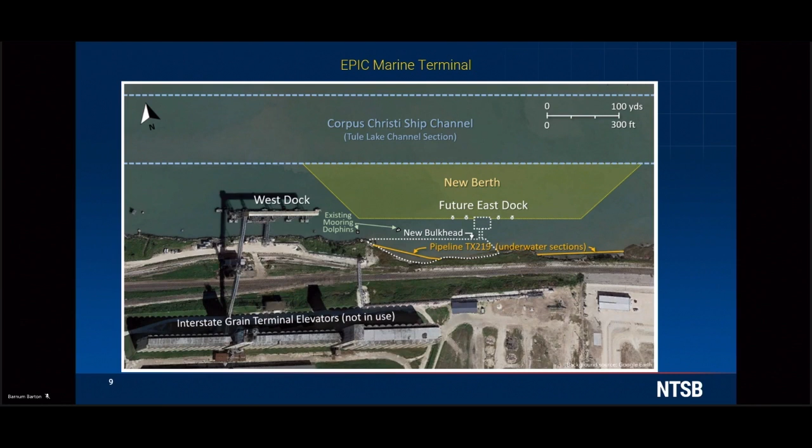Later that year, Epic began planning for a second crude oil dock to the east. The new berth and dock, labeled Future East Dock and highlighted in the yellow shaded area of the image above, required construction of a bulkhead along the shoreline and dredging of a new ship berth between the dock and main shipping channel.

Orion Marine Group, a subsidiary of Orion Group Holdings, a heavy civil marine construction company, was selected by Epic to construct East Dock and dredge the associated berth. The marine construction and dredging operations were contracted separately and undertaken by different divisions within Orion.

Schneider Engineering and Consulting, a wholly owned subsidiary of Orion Marine Group, developed the dredging construction plan for Epic's East Dock, which will be discussed later in greater detail by Mr. Ehlers. The non-propelled 152-foot-long cutter suction dredge Waymon Boyd was used for the EPIC dredging project.

Waymon Boyd operated 24 hours a day in two 12-hour shifts. During normal 12-hour shifts, the dredge and its attendant barges and supporting vessels were crewed by 17 to 19 personnel.

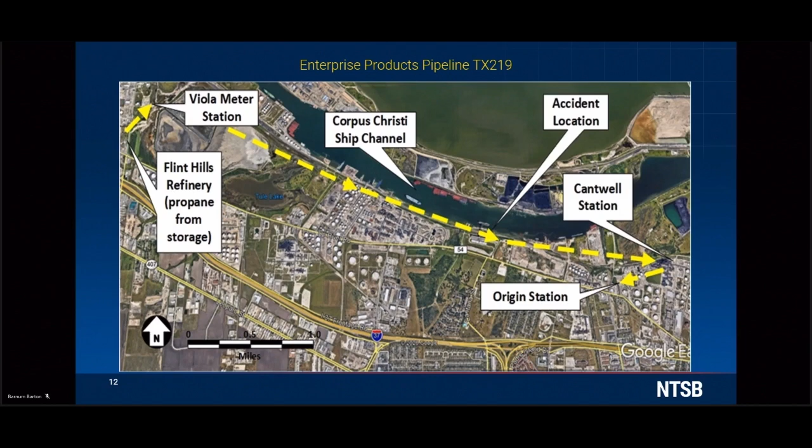Near the accident location, the pipe was coated with coal tar and a 2-inch thick exterior concrete coating. The pipeline was constructed in 1968. The breached pipe had a 16-inch outside diameter. The pipeline pressure was 257 pounds per square inch gauge at the time of the accident.

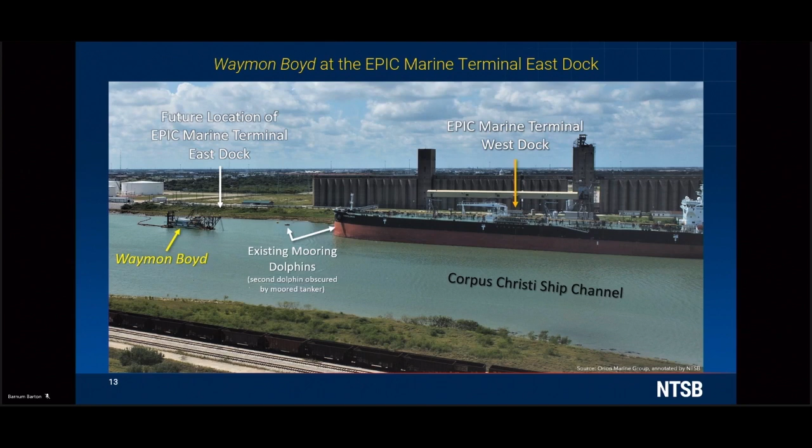On August 21st, about 8:02 a.m. Central Daylight Time, TX219 was struck by the Waymon Boyd's rotating cutter head, causing a breach in the line that allowed propane gas to escape and form a gas cloud that surrounded the dredge.

EPIC's marine terminal security camera footage that I will now play for you captured the initial breach of the pipeline and the eruption of water and gas, the initial explosion and ensuing fireball that made its way up to the grain terminal. For reference, the security camera is looking west at EPIC's West Dock. Waymon Boyd is just outside of view of the camera on the right-hand side, center line of the frame. A portion of the video prior to the explosion has been sped up to reduce the length of the video.

I will pause before starting to allow those that do not wish to view to look away. The video is 76 seconds in length. Viewers' discretion is advised. Please start the video.

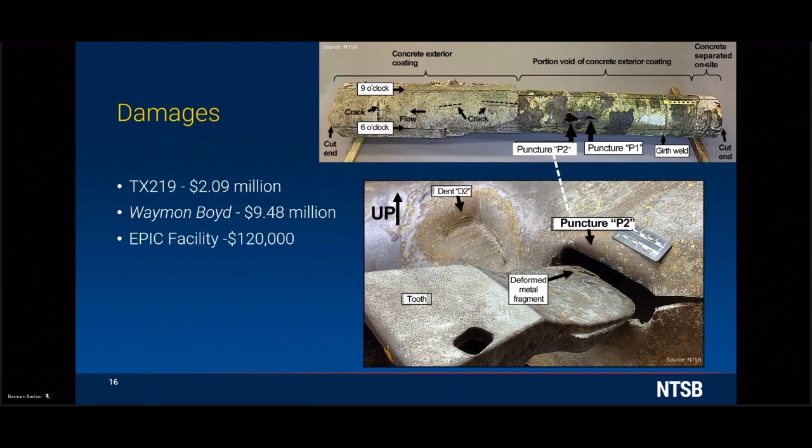This concludes my presentation. Mr. Ehlers will now discuss nautical operations.

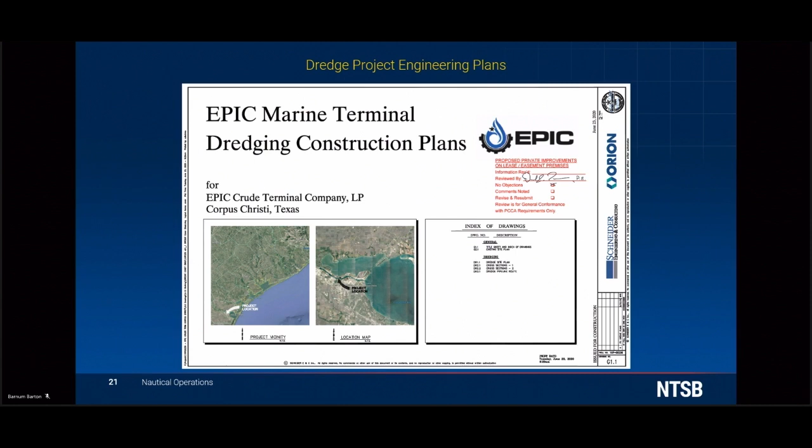The first drawing in the Schneider engineering plans, titled Existing Site Plan, showed a satellite image of the project area. The plan included an outline of the 46.5-foot deep berth that was to be dredged, as well as 3 pipelines that ran along the shoreline.

The location data for the pipelines had been provided to Schneider via Orion by the site owner EPIC and were based on a 2018 utilities survey. The most northerly of the pipelines was TX219, the accident pipeline.

The plan did not show no-go areas, also known as tolerance zones, around the pipelines. This area southward of the berth that was to be dredged on a slope was also not depicted in the drawing.

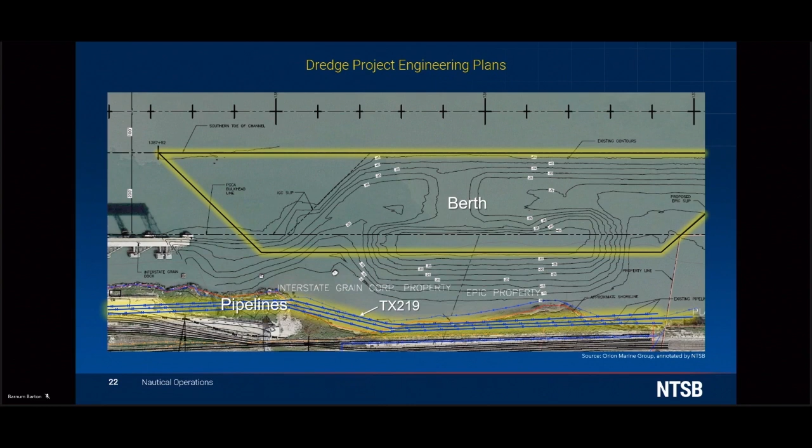The next drawing in the Schneider plans, titled Dredge Site Plan, showed a line diagram of the project area. The plan included the outline of the berth that was to be dredged and also showed a partial depiction of the sloped area to be dredged.

However, the slope was not shown in the area of a proposed bulkhead. This bulkhead had not been constructed at the time of the accident. The pipelines that had been shown in the existing site plan were not shown in this drawing or any of the remaining drawings in the full set of plans.

Thus, there was no drawing which showed both the pipelines and the full extent of the dredging area, including the slope. In the plan legend, which was in the lower right corner of the dredge site plan, the shaded area in the drawing was labeled dredge limits. However, in the drawing, only the berth was shaded and not the slope that was to be dredged.

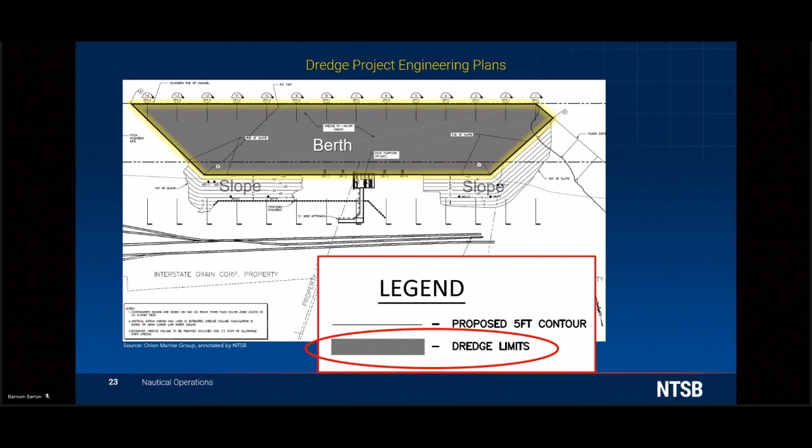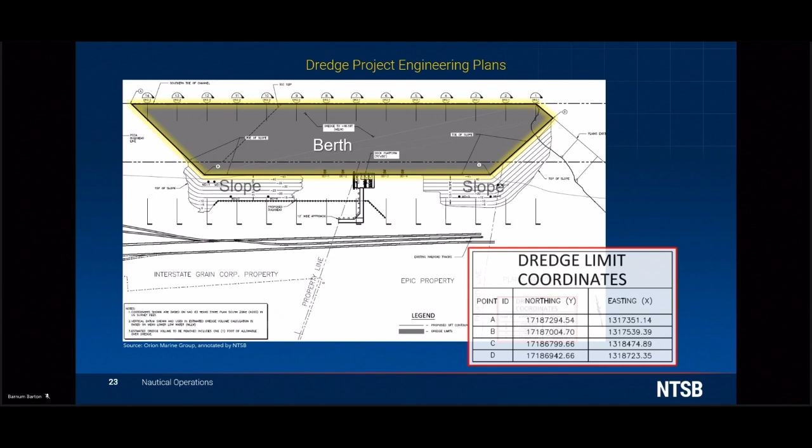A table with geographic coordinates was also located in the lower right corner of the dredge site plan. Although the table was labeled dredge limit coordinates, the points in the table once again marked the berth area only and not the full extent of the dredging area, which included both the berth and the slope.

Staff found that the plans for the Epic Dock project did not clearly reflect the proximity of the pipeline to the full dredging area. This was because Schneider Engineering and Consulting did not have company specifications, quality control measures, or best practices for including pipeline hazards and tolerance zones in their plans.

As a result of this finding, staff proposes that Orion Group Holdings require their subsidiary company, Schneider Engineering and Consulting, to develop specifications and quality control measures to ensure pipeline and other hazard data is included and clearly represented in engineering plans and drawings, including depicting tolerance distances from underwater hazards. Mr. Stansel will further discuss the Epic Dock plans and factors relating to the accident during his presentation.

The operator of a dredge, known as a leverman, cannot see the cutter head he or she is controlling or the surface being excavated. Therefore, the leverman uses a computer application to provide a virtual display of the digging tool and dredging area. The application used aboard the Waymon Boyd was called DredgePack.

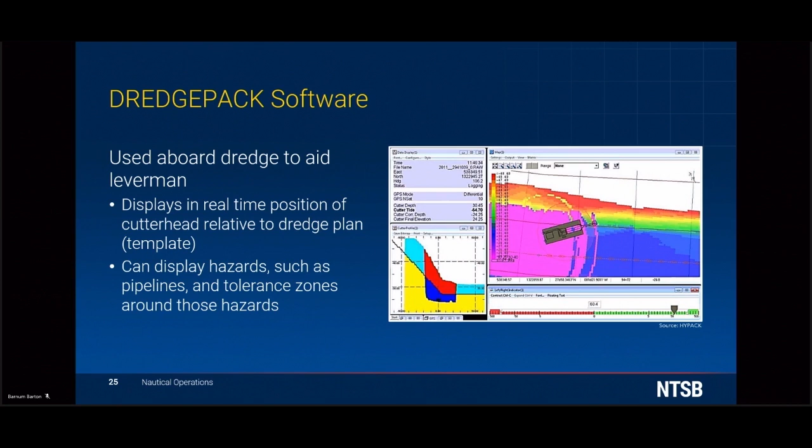Having accurate pipeline location data incorporated into DredgePack or other navigation software on board a dredge is critical to avoiding pipeline strikes and other potential hazards. However, Orion had no written procedures requiring pipelines or other utilities be entered into DredgePack. Although Epic provided location data for pipeline TX219 to Orion before dredging began, Orion did not include the data in the DredgePack dredge template used aboard the Waymon Boyd.

Consequently, the Waymon Boyd leverman had nothing in DredgePack to indicate the danger he faced on the morning of the accident. Above and beyond the use of DredgePack, the investigation uncovered that Orion Marine Group did not have any written procedures or policies for planning dredging operations near pipelines. These policies and procedures could have enabled the company and its personnel to establish effective pipeline damage prevention measures and share them among key employees involved in the Epic Dock project.

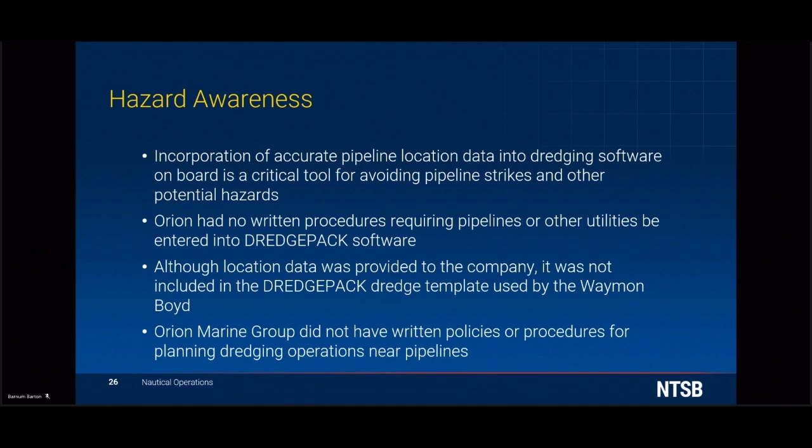Staff found that Orion Marine Group did not have adequate procedures to require that pipelines be identified and included in DredgePack software. Thus, the Waymon Boyd's leverman was unaware how close the cutter head was operating to the pipeline. Further, staff found that overall, written policies and procedures could have eliminated confusion about the pipeline TX219 location and minimum tolerance distances for pipeline damage prevention.

Thus, staff proposes that Orion Group Holdings require Orion Marine Group to develop standardized written procedures and policies for planning dredging operations near pipelines that include pipeline operator engagement on pipeline avoidance measures, minimum tolerance zones, minimum requirements for marking and verifying pipelines, and uploading of pipeline information into DredgePack or other navigation software.

The leverman told investigators that just before the accident, the dredge cutter head was near the top of the slope in the dredging area and fully within the boundary of the template. However, staff determined that at the location of the breach, pipeline TX219 was about 1 foot outside the dredge template. The Waymon Boyd cutter head was over 100 feet from the operator, turning below the water surface, and the leverman was reliant on DredgePack software to position the 2.9-ton digging apparatus.

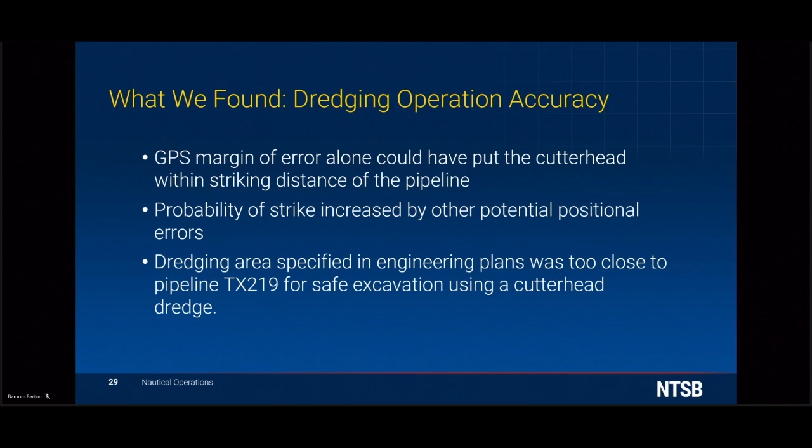The Council for Dredging and Marine Construction Safety, abbreviated CDMCS, is an organization whose stated purpose is to create an injury-free workplace and safety-first culture for the dredging and marine construction industry. In January 2020, eight months before the accident, CDMCS published a best practices guide for safe dredging and construction activities near underwater gas and hazardous liquid pipelines.

Contained within the guidance were recommended actions for dredge crews in the event of a pipeline strike. These actions included immediately stopping all operations, shutting down or minimizing the use of possible ignition sources, accounting for the crew, informing them of the dangers, and evacuating the vessel if needed. Although Orion Marine Group was a member of CDMCS, the company did not train its crews in these recommended actions and did not have an emergency procedure for a pipeline strike. Consequently, when the Waymon Boyd struck the TX219, the leverman did not secure sources of ignition, inform the crew, or order an evacuation—actions which may have delayed the explosion.

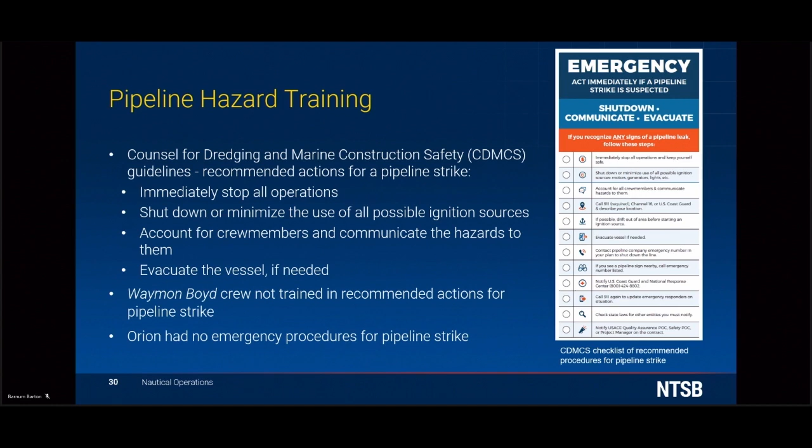Staff found that prior to the accident, the Waymon Boyd crew lacked function-specific pipeline safety training and emergency procedures that could have prepared them to react quicker and more effectively to the gas pipeline strike.

After the accident, Orion addressed this issue by instituting semi-annual utilities awareness training, which includes emergency procedures in the event of an accident. Additionally, emergency procedures in the event of a pipeline strike have been integrated into periodic fire and abandon ship drills conducted on Orion dredges.

Staff believes that the entire dredging industry would benefit from training on utilities awareness and emergency procedures in the event of a pipeline strike. This need can be addressed through an interactive online pipeline safety training course developed by the Coastal and Marine Operators Pipeline Industry Initiative, or CAMO, titled Working Safely Near Underwater Pipelines. The course covers topics such as planning steps for pipeline and marine construction personnel, project design implementation, pipeline avoidance, and daily safety and emergency checklists.

This CAMO training would be further enhanced by the use of examples and lessons learned from the Waymon Boyd pipeline strike and explosion. Therefore, staff proposes that CAMO modify the existing online pipeline safety training to incorporate lessons learned from this accident.

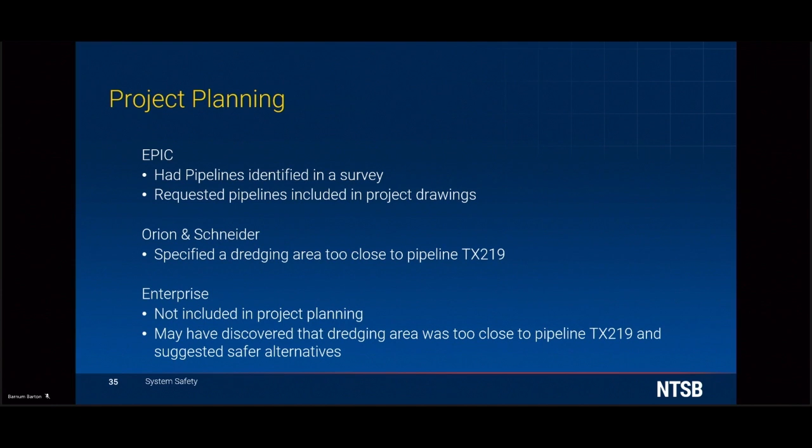Orion's Health, Safety, and Environmental, or HSE, policies manual required the completion of a site-specific safety plan for the project. The regional HSE manager who developed it said it was an emergency response plan, which he completed by inputting applicable maps and phone numbers. He did not complete a risk assessment and was unaware of the pipelines near the dredge area. The site-specific safety plan did not address the pipelines in the area of the project, nor any site-specific risk. It did not help the captains, crew, or levermen manage the risk associated with dredging near pipeline TX219.

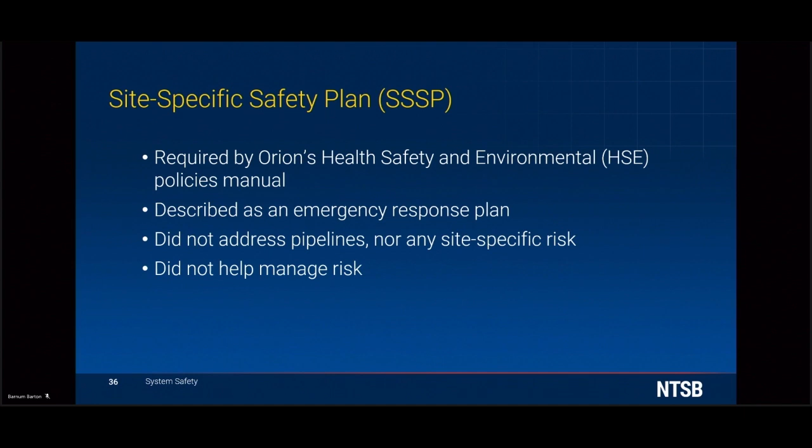Orion's HSE manual required a job hazard analysis during the pre-planning stage of the project. However, there is no evidence that this was completed. Orion did not complete a formal risk assessment for the project. The hazard presented by conducting dredging operations near pipeline TX219 was never formally identified or documented, and the risk was not completely understood.

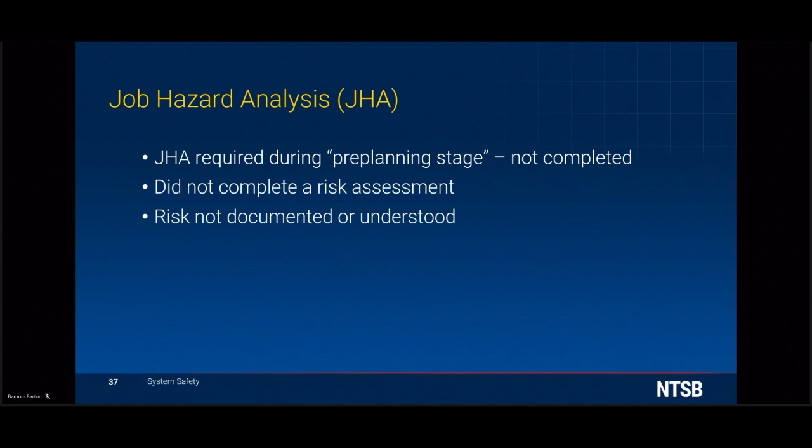Effective controls protect workers from workplace hazards and help avoid injuries, illnesses, and incidents. Orion's HSE manual indicates that the hierarchy of controls should be used to mitigate hazards. It requires that when a hazard is identified, first attempt to eliminate the hazard. If elimination is not practicable, use engineering controls. If engineering controls are not practicable, implement administrative controls, and so on.

Engineering controls were available to control the risk of a cutterhead impact with pipeline TX219. Orion could have established a tolerance zone around the pipelines in the engineering plans.

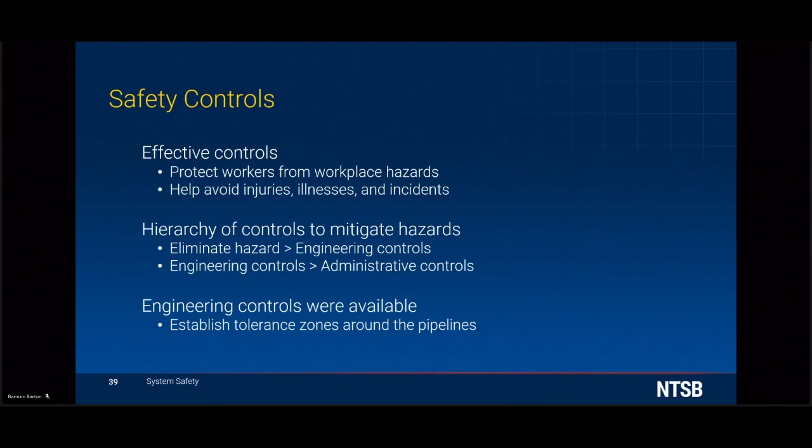Staff found that Orion's project planning and risk management were inadequate, which resulted in their failure to identify and mitigate the risk of a cutterhead impact with pipeline TX219. Staff believes it is critical that organizations have project planning steps that support accurate risk assessment and proportionate mitigation. Thus, staff proposes that for all future dredging projects, Orion conduct a formal documented risk assessment and develop a hazard control plan.

This concludes my presentation. Mr. Stansel will now discuss pipeline operations.

Good morning, Chair Homendy, Vice Chairman Landsberg, and members Chapman and Graham. My presentation will cover pipeline damage prevention safety issues that were identified in this investigation.

One-call systems allow excavators to make a single notification of their intent to excavate. One-call centers contact affected utility operators, who in turn are responsible for communicating with the excavator to review project plans and assess potential impacts to their facilities.

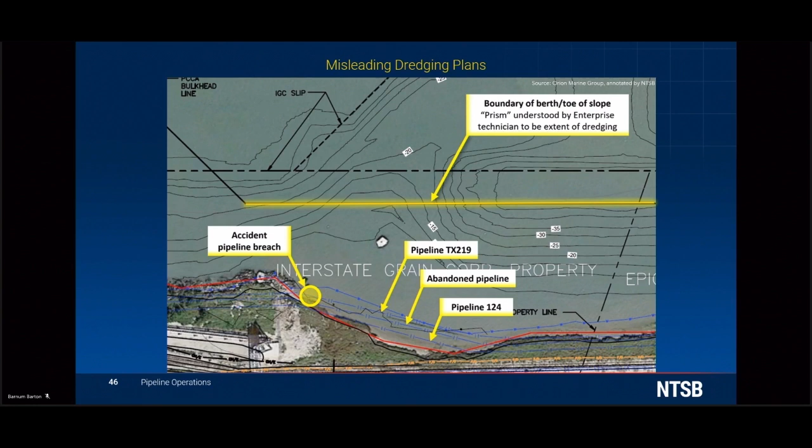As a result of their assessment of plans and information provided by the project engineer, Enterprise technicians closed the one-call tickets, believing pipeline TX-219 would be clear of the project and there would be no dredging near the shoreline. Thus, technicians concluded that no marking or other protective measures would be required because the dredging boundary exceeded the Enterprise Damage Prevention Program 50-foot distance limit for mandatory marking.

Investigators developed this image to depict information that was available to Orion during the planning phase of the dredging project. Investigators incorporated pre-accident pipeline survey data into DredgePack software and built a dredge template with 2.5 to 1 slopes identical to that which would have been loaded onto the Waymon Boyd's computer. The combination of this data shows the outside diameter of the pipeline was actually situated only about 1.2 feet from the edge of the dredge template at the accident location.

Had this information been available to the pipeline technicians during their one-call review, they likely would have recognized the need for compulsory marking and the presence of a pipeline technician on site to monitor dredging work, among other actions to protect the pipeline.

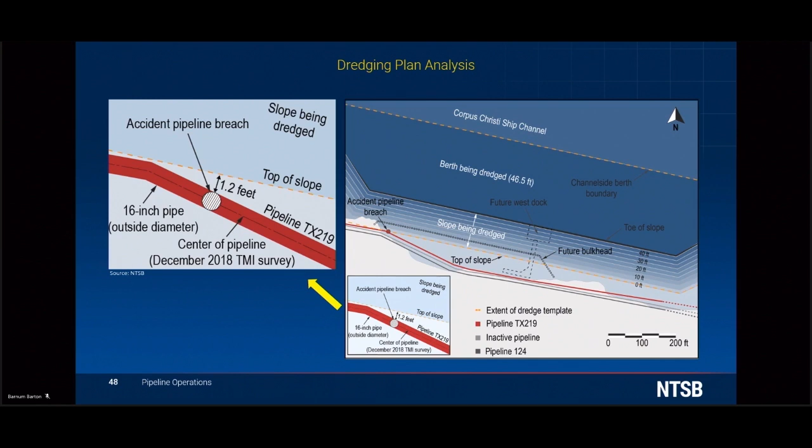In summary, staff found that inaccurate communications following the one-call notification and misinterpreted dredge plans dissuaded Enterprise from installing compulsory pipeline markings and implementing other protective measures. Staff also found that marine construction projects require a greater level of collaboration and engineering review to ensure pipeline operators have greater awareness of the project scope and that potential safety impacts are accurately assessed.

Therefore, staff proposes that Orion Marine Group develop written dredge planning policies to include utility operator engagement for pipeline avoidance measures. Further, staff proposes that the Pipeline and Hazardous Materials Safety Administration, the coastal and marine operators, and the Council for Dredging and Marine Construction Safety work together to develop processes for disseminating accurate pipeline location coordinates to dredge operators during planning and one-call locating activities.

Next, I will discuss how the pipeline was marked prior to the accident and shortcomings in excavation pre-marking requirements.

Given the Enterprise one-call review that determined dredging would occur outside of their 50-foot mandatory marking zone, pipeline technicians did not mark the pipeline for excavation damage avoidance.

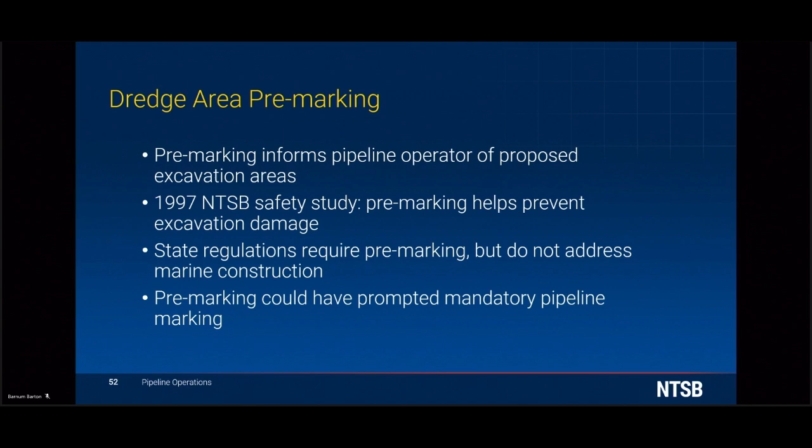In summary, staff found that the widely spaced courtesy marking did not provide sufficient visual warning to the dredge crew of the danger posed by the presence of the pipeline.

Additionally, to ensure more accurate communications, staff believes that project boundary pre-marking would provide utility operators with visual confirmation of pipeline encroachment.

Therefore, staff proposes safety recommendations to the Pipeline and Hazardous Materials Safety Administration, the Coastal and Marine Operators, and the Council for Dredging and Marine Construction Safety to work together to develop guidance for pre-marking dredging project boundaries before one-call notifications are made.

Finally, I will discuss the need for more expansive tolerance zones for the safety of dredging projects near pipelines.

Tolerance zones define areas near pipelines where no mechanical excavation activity should occur, and within which extra protections are needed for safe dredging.

Texas and many other state regulations require excavation equipment to maintain a minimum buffer of at least 18 inches from a pipeline wall. In addition, Enterprise procedures require technicians to be on scene to monitor activities when excavations occur within 12 feet of a pipeline.

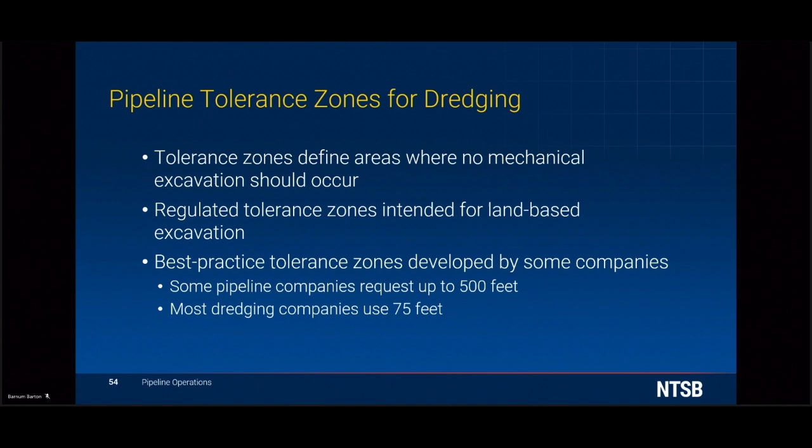In summary, staff found that inherent cutterhead dredging location inaccuracies make state-regulated tolerance zones inadequate for safe dredging. Additionally, staff found that Enterprise's Damage Prevention Program does not provide for a sufficiently large tolerance zone for dredging operations. Therefore, staff proposes a safety recommendation to the Pipeline and Hazardous Materials Safety Administration to ensure that states incorporate minimum

tolerance zone criteria for dredging in their pipeline safety programs. Staff also proposes a recommendation to Enterprise Products to revise its damage prevention program guidelines to include a larger tolerance zone appropriate for dredging operations. This concludes my presentation.

Thank you, Mr. Stansel. This concludes our presentations. Chair Homendy, we're happy to answer your questions at this time.

Thank you very much. Thank you, Mr. Wisniewski, Mr. Ehlers, Dr. Hoff, and Mr. Stansel for your excellent presentations, and thank you for all your work on this investigation. We'll now turn to board member questions focused on the key safety issues in this accident. First, operations. Then we'll ask questions on project planning and risk assessment, and then on pipeline damage prevention, and then finally any other safety issues board members would like to raise. Some members may have comments on every safety issue, some may not. The purpose of this discussion and focused deliberation is to highlight those areas where we believe we can make the most impact on improving safety.

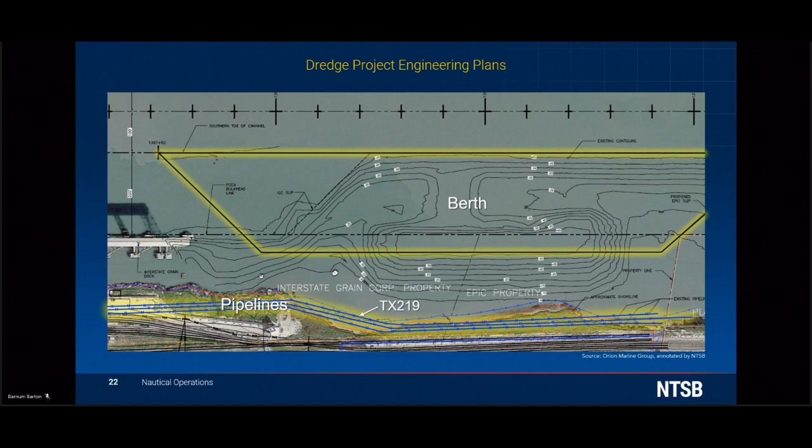and so therefore it was pretty much dismissed as a danger when the actual dredging began. So just to clarify this, on slide 22 and 23, slide 23 being the dredge limit coordinates, perhaps we could bring those up. It appears that there was no dredging plan outside of the highlighted yellow limits that we see on this slide, and on slide 23 it's marked A, B, C, and D. And yet the blue lines on the previous slide clearly indicate that there were pipelines. Could you explain this a little bit more? I mean, I'm confused about why the company, if they knew it was there, didn't explain that to their operations team.

The problem, we believe, starts right here with the drawing, that there was no drawing that showed both the pipelines and the full extent of the dredging, which included the slope. And so the project engineer, who was responsible for communicating the danger both to the utility company Enterprise and also internally to the dredge, made an inaccurate estimate of the distance between the pipelines and the dredging area. So almost every Orion person we talked to said they believed it wasn't a danger because it was, again, outside the template.

Okay, well that was a critical omission. It was noted in the report that Orion had scheduled safety briefings prior to the beginning of each work shift. Did those briefings include any sort of checklist or format to cover mandatory or critical items such as pipelines? No, we did not see any checklist associated with the daily safety briefs. They did a safety topic and then covered things like PPE, and there was absolutely no indication of dangers such as pipelines. That doesn't seem like a very effective checklist.

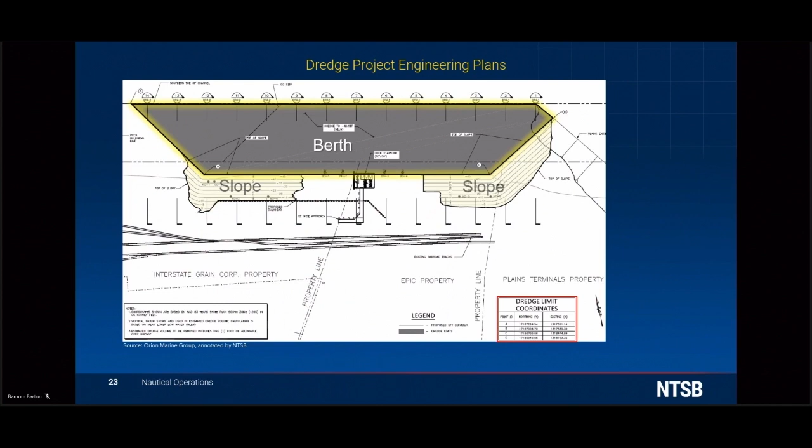If you could pull up slide 23 again, that would be great. As we know on that slide, the dredge site plan listed 4 coordinates, A, B, C, and D, shown in the bottom right there. Those were the coordinates for the berth only. Is that correct? That's correct. So did the dredge site plan list any coordinates for the slope? No, it did not.

So how did the survey superintendent generate the slope in the dredge pack? Dredge pack has an automated generator for a slope. So the person developing the plan puts the coordinates of the berth in, and then tells the system, that is dredge pack, that they want a 2.5 to 1 slope, and then dredge pack automatically develops that and comes up with the coordinates for the extent of the slope.

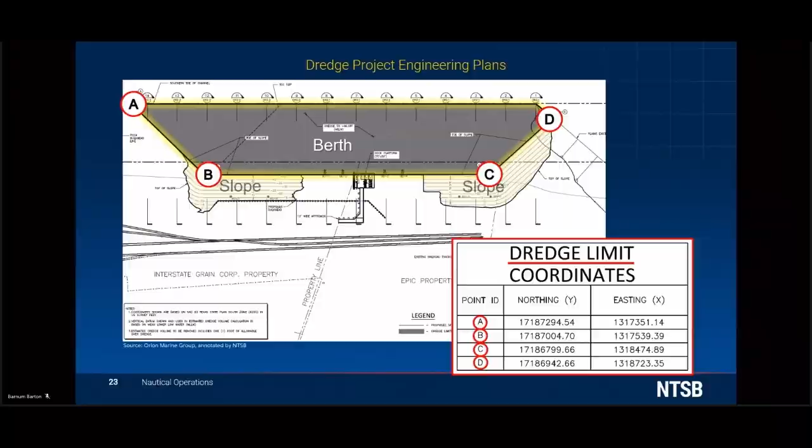Did Orion input the pipeline location into the dredge pack? No, they did not. So what is the process, and please include the time and resources to program the pipeline location into the dredge pack. It's a very simple process because the pipeline information had been provided in an AutoCAD format, which can be imported into dredge pack. We did this, the NTSB staff did this with the assistance of a HYPACK representative, and I think it took less than a minute.

Less than a minute. Can you pull up slide 28, please? I know it takes a minute there. Yeah, we look at the cutter head there.

That's a large, heavy, imperfect piece of machinery, as you said in the presentation. The pipeline was within 1 foot of the planned dredging, and Orion failed to input the pipeline data into dredge pack, which could have shown the Waymon Boyd crew the location of the pipeline before it was struck. What a tragedy. I don't understand why that wasn't done. Chair, I'll go ahead and yield back the rest of my time.

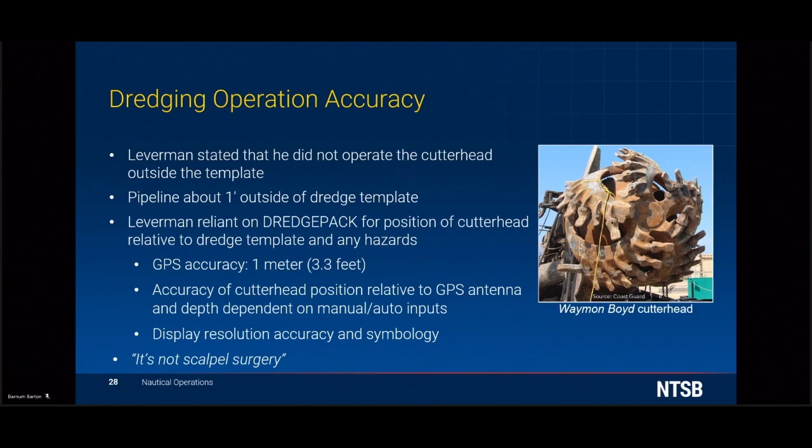Thank you. Thank you, Member Graham. Member Chapman.

Thank you, Chair. The presentation was really excellent. I'm not familiar with this sort of operation, so I'm learning as we go along here. Really appreciated the outstanding presentation, and I'll be asking some questions, I'm sure, which will require you to repeat some of what was already presented, and I hope you'll bear with me.

I have a few questions regarding, I believe it's called the SCADA system. How is that acronym pronounced? SCADA. Yes, I understand that SCADA is an acronym for Supervisory Control and Data Acquisition. Will you please describe what the SCADA system is designed to do?

In this particular case, the SCADA system monitors the flows and pressures on the pipeline at various locations, and also reports unusual operating conditions via error messages or alerts to the pipeline controller at the controller's headquarters in Houston.

Did the SCADA system function as intended in this case? Yes, it did. It generated a number of alerts, including a low pressure alarm within seconds of the pipeline breach. It was identified to the pipeline controller, who acknowledged the alert. The initial indication was a 44 PSI drop from where it had been running.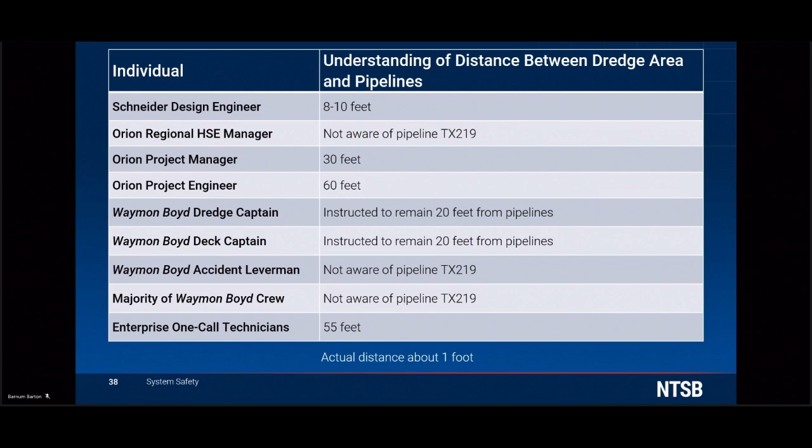You can take down that slide. Following the pipeline strike, Orion instituted underwater utilities awareness training for all dredge crews and shoreside support staff. An overview of the training tool is at the end of Orion's party submission. I looked at the description of the training, and then I looked at training in CAMO, and it seems to not address all the issues that training should address, although granted, I haven't watched whatever training video there is with this. But what should training look like?

Well, I think, again, I'll let Paul join in here. I think number one, a great start is that CAMO online training that's provided, which covers everything from pre-planning up until day-to-day operations. I think from there, training needs to include site-specific awareness. For instance, Orion told us that not only do they do semi-annual training, but they also do training if a project includes a pipeline. We would hope that training includes making the crew of the dredge and those involved aware of those site-specific hazards that are there.

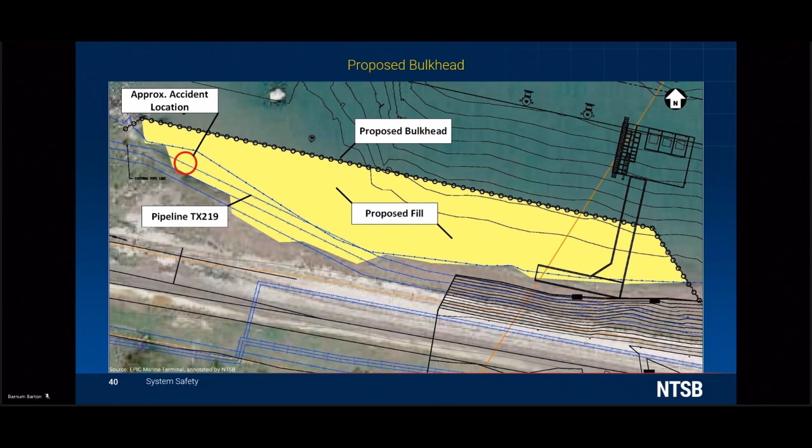Looking at the Orion party submission, I am just amazed. There's a section, section 4, titled failures of Enterprise. They want to put blame on Enterprise for a lot of different things. One of them was for not putting a diverse risk assessment team together that would have flagged the EPIC dock project involving dredging near shore, calling for a bulkhead and fill. I'm quoting from their submittal: an experienced risk assessment team would have made sure the bulkhead and fill were accomplished prior to dredging, or ensured that a company representative was present on the dredge.

So Orion didn't have a risk assessment team, is that correct? That is correct. And in this case, if there was a risk assessment team, who should have put that team together?

That likely would have been the regional HSE manager assigned to the project. The HSE manager for Orion, correct? For Orion, yes. So I think it's very interesting that they put the onus on enterprise to put this together and have either put the bulkhead in first or made sure one of their representatives was on the team, but yet they were never invited to a team that didn't exist. Is that correct? Yes, sir. All right, thank you for that. And that's all the questions. Well, I have more questions on this, but I'll yield back the rest of my time. Thank you.

Member Chapman. Thank you, Chair. I actually want to pick up a little bit on a similar theme to Member Graham's questions.

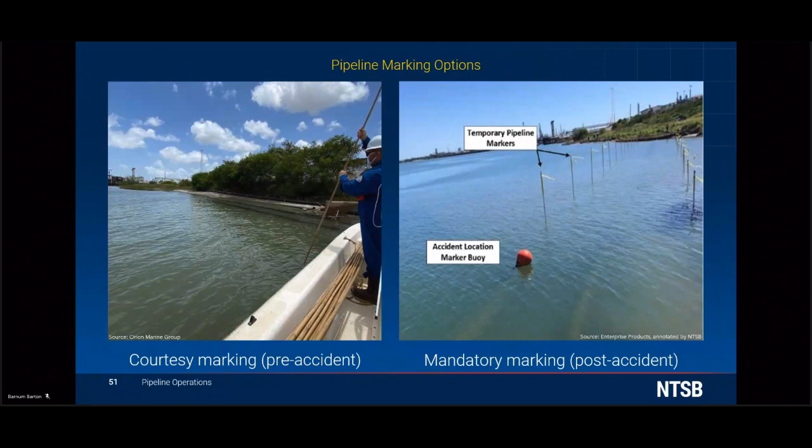Okay, so the pipeline was not marked for excavation damage avoidance, and I just want to clarify this one line here. At some point, Orion contacted Enterprise through 811, and they issued an all clear because they were under the understanding that these dredging operations were 55 to 60 feet off of their pipeline, correct?

Yes, by the beginning of July, the one-call ticket was closed out as clear, and the pipeline status was indicated as not marked. And so Orion called Enterprise back, and Enterprise then came out and marked the pipeline on July 16th. Did Enterprise have to do that?

They did not. Based on the information that they had originally been provided, they did not. But they did come out. They met that time in person with the project engineer, and the information did not change from the previous one-call communication. So 9 days after the cane poles were placed to mark the pipeline, a Category 1 hurricane struck the Texas coast just south of Corpus Christi.

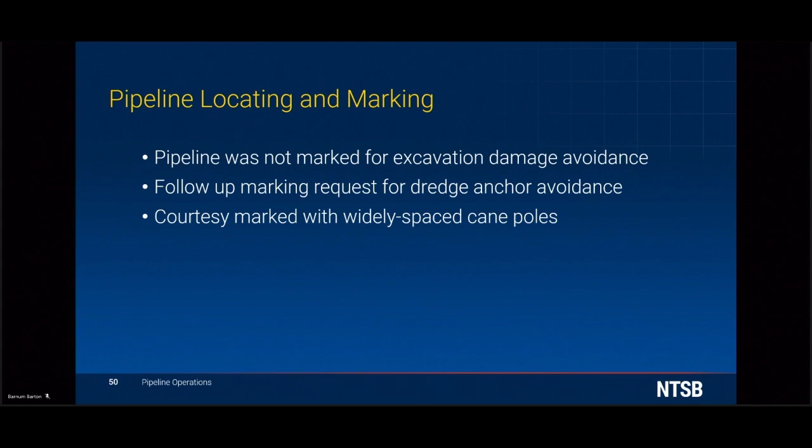Apparently, I'm way over time. I am so sorry to my colleagues, I did not know that. So Paul, I'm going to stop and allow my colleagues to just ask questions. I apologize, I did not see my timer.

So Member Graham, use the time you need. Member Chapman and Vice Chairman Landsberg, did you have additional questions? I do, Chair. Okay, thank you very much. You apologize, you were on a roll, so I understand.

Sorry. So there was a submission by one of the parties, Orion, that stated that the pipeline was not being properly maintained. So two questions: was shoreline erosion or loss of surrounding dirt and rock a contributory factor? And would it have made any difference had the pipeline been covered with additional layers of dirt?

We pointed out in the report that the area where the pipeline damage occurred had been subjected to erosion, some significant erosion since the time the pipeline was initially installed. And there's a photograph in the report demonstrating that.

We eliminated pipeline cover as a contributory or causal factor because the pipeline was struck from underneath. The punctures occurred at the 7 o'clock position on the pipe. So with the cutter head approaching the pipe from underneath, it would not have mattered how much cover was over the pipeline. It would have quickly been suctioned away by the cutter head, and there would have been no difference in the outcome.